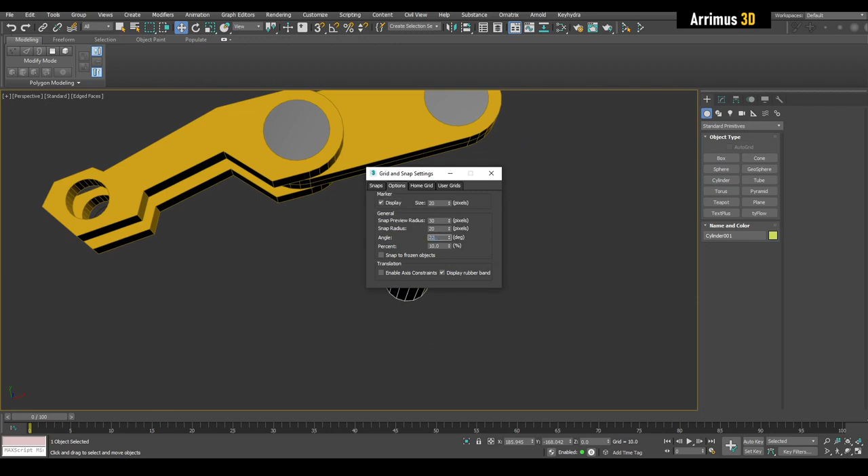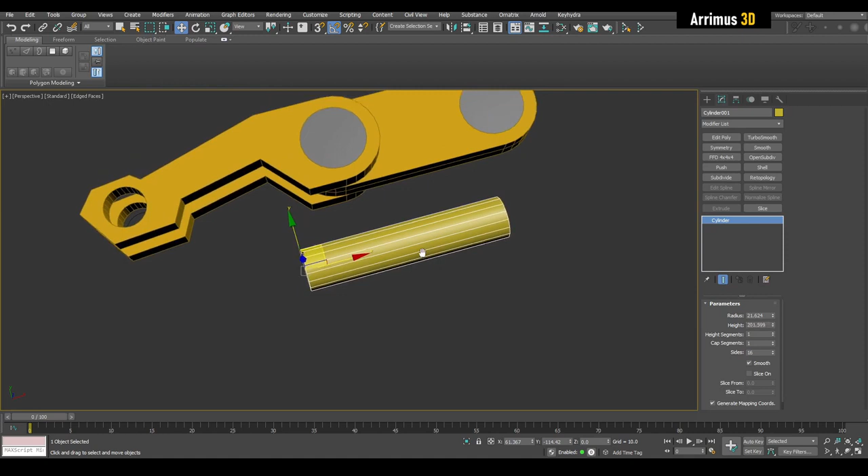Let's increase the height. So we're going to have this. Then I'm going to press Ctrl+V to create a copy of this. We're going to move that here, change the radius, and change the color as well.

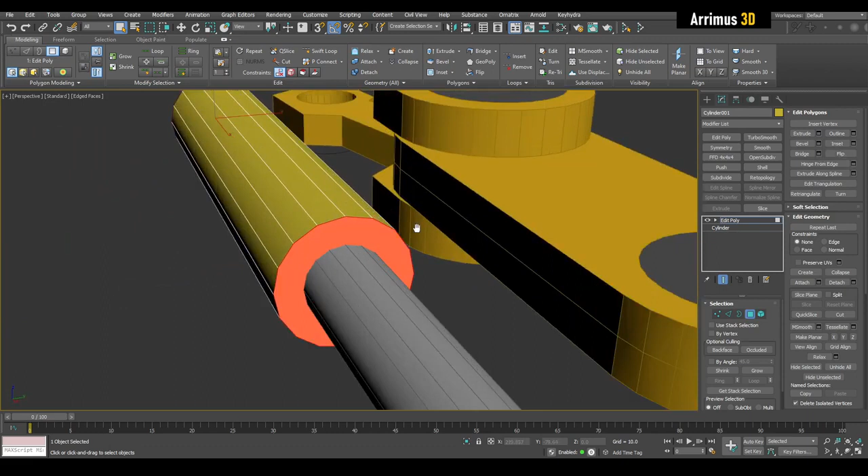Now that we've got that, let's modify this as well. I'm going to apply Edit Poly on top, select this and this. Now you can use inset on this, or simply scale on the Z and Y axis holding down Shift.

Then simply bridge. Now we have this hollowness here, so now this can go inside of here.

Now we need to set up 2 pivot points for this. Actually, for this I want to close this up. So what I would do is insert a loop through here, then select a polygon here, hold Control, double click to get this, and hold Shift while scaling. I'm pretty much going to delete that, double click on this, and what I would do is deselect these and bridge that.

Select an edge here, ring, connect, and then just target weld.

To speed up the process for this, I can just hold Shift, Control Shift, and move to flow into element, flip that, press S for snaps, right click here, make sure it's set to vertex. I'm going to hold Control and convert to polygon selection to vertices. I'm going to snap this right here, select this, and we're going to weld. So now pretty much being limited to right here.

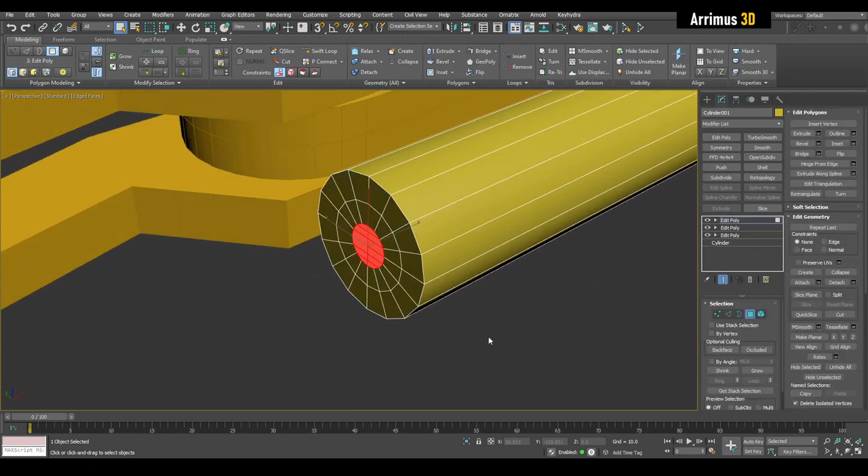Next, what I need to do is just use by angle. So what I'm going to do is extrude this. I'm going to select this and hold Control and click on remove. What I'm going to do essentially is use the cut tool like so. I'm going to weld just in case.

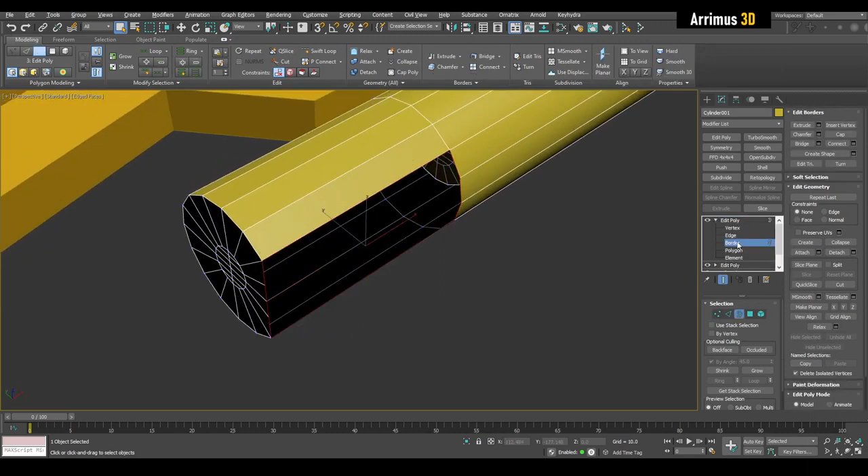Now I'm going to simply delete this and go into border level. Select this and Alt+P to cap, that's the default hotkey. If it looks a bit strange, all I have to do is select these vertices and connect.

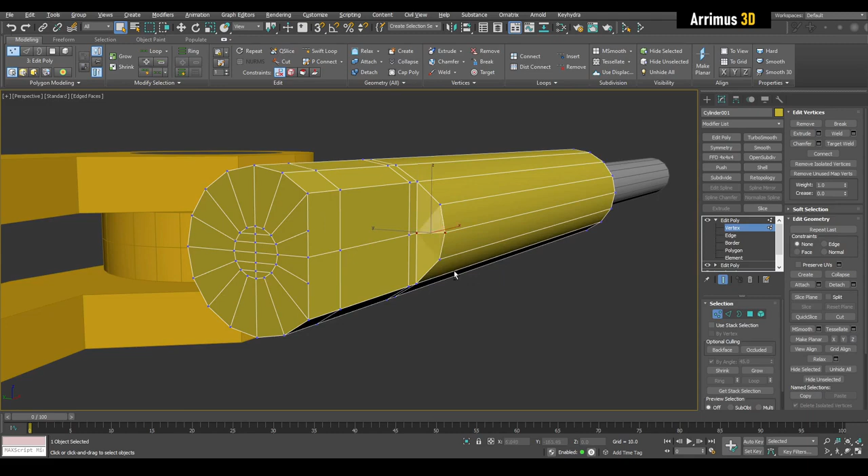So we can also insert loops through here. Select these edges and move them. I am going to select this, ring, connect these. I'm also going to switch this - if you're seeing this effect right here, simply switch to model assist. So we have that.

We have 2 quads here, but we have an n-gon here. How do we fix that? Well, what I would do here is just select this right here and remove that. There we go.

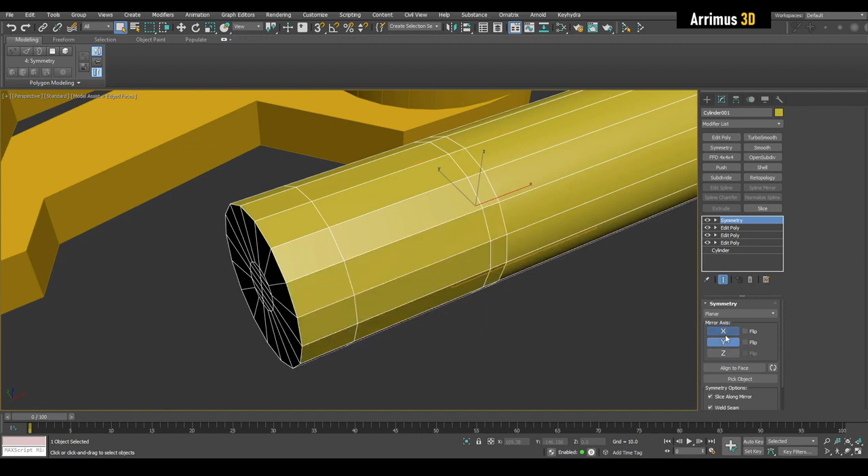Now let's apply symmetry as well, on the Y axis, and flip that. Now we have this happening. This will look a lot better once we subdivide it, but I'm also going to insert a loop for better subdivision right here.

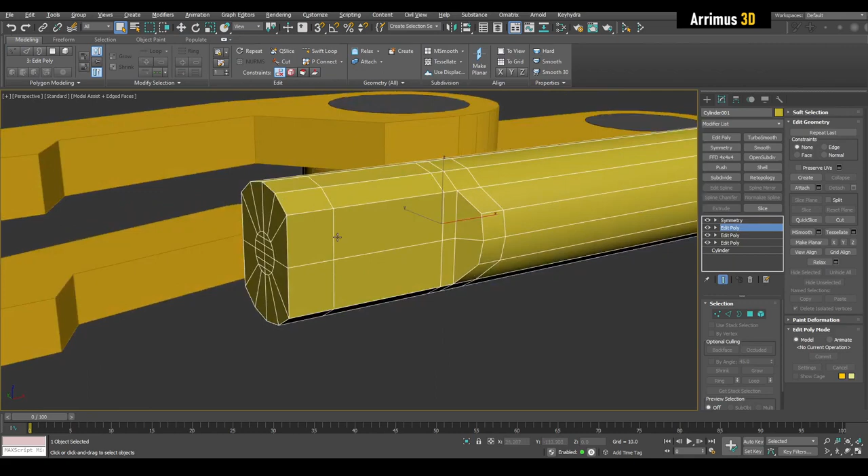Alright, we also need a hole through here. So what I will do is insert a loop here, double click on the loop to loop it. What I'm actually going to do is hold down Shift, left click, left click, left click, left click to get that. I'm going to inset right here.

And what I'm going to do is insert a loop through here. I'm going to select these 4. I'm going to hold Shift while scaling. I'm going to use a script called the regularizer script, which I've set to a hotkey. You can just move this all the way here because symmetry will take care of that.

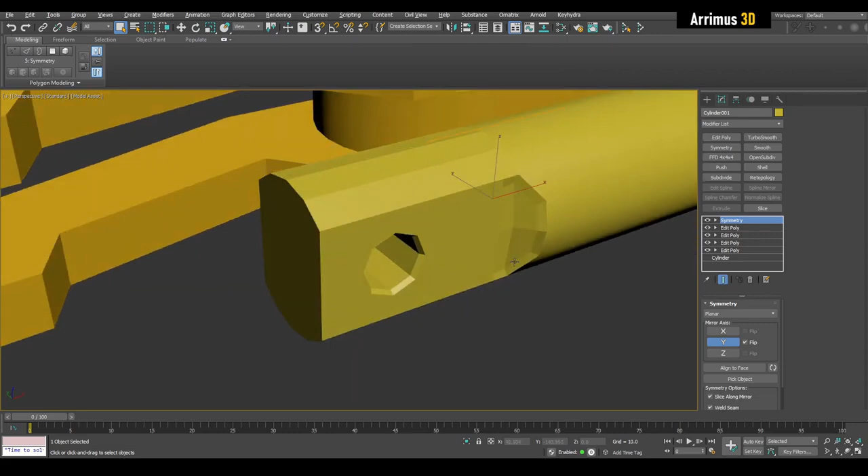So now we have a place to put another object here. What I like to do is that sometimes as you're modeling, you will have some smoothing groups and some polygons unsmooth, which creates this kind of effect. I like to just apply a smooth modifier to even them all out, and then we can very easily see all of the individual faces.

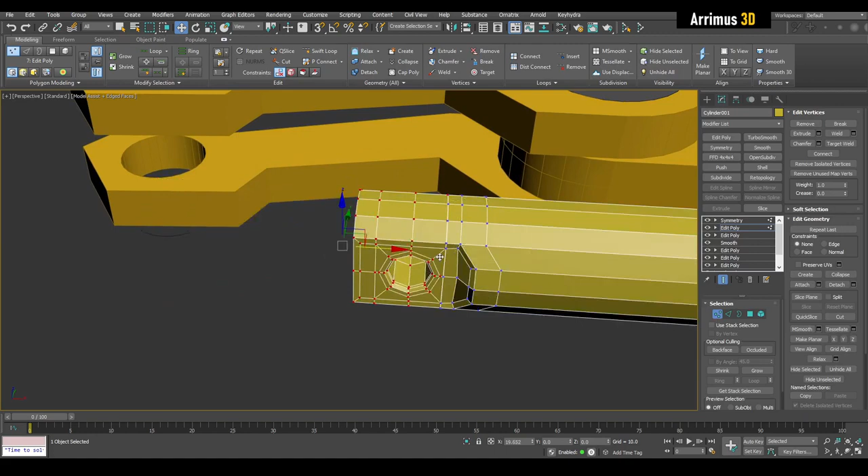Alright, we've got this. You can feel free to just kind of modify this. You can make this longer or shorter like this. Alright, I'm going to go with something like that.

For better subdivision, I'm also going to just use the cut tool, set up different loops here.

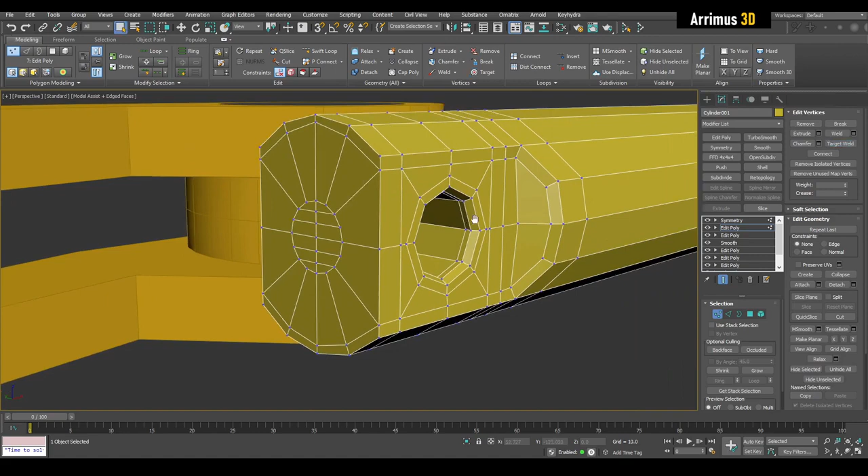I want to insert a loop here as well. Maybe one right there.

Alright, now in order to get something to hold this, I'm going to go into face level. I'm going to use by angle to select this. Alright, I'm going to detach that as a clone.

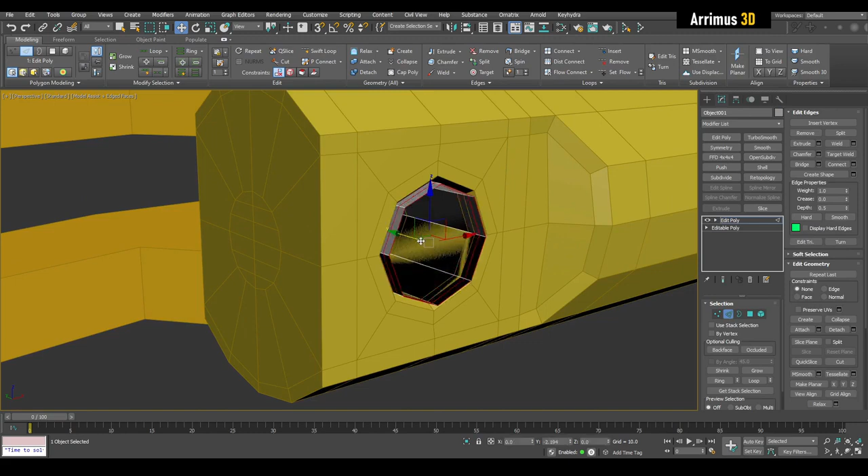We now have a new object here. I'm going to delete this. I'm going to flip polygons. I'm going to give this a different object color, and I'm going to select this, and I'm going to move this out here. I'm going to reapply symmetry there.

Alright, next I want something to hold this, so I'm going to just copy the symmetry modifier. I'm going to turn off by angle. I'm going to select, let's say, these faces, and detach them as a clone.

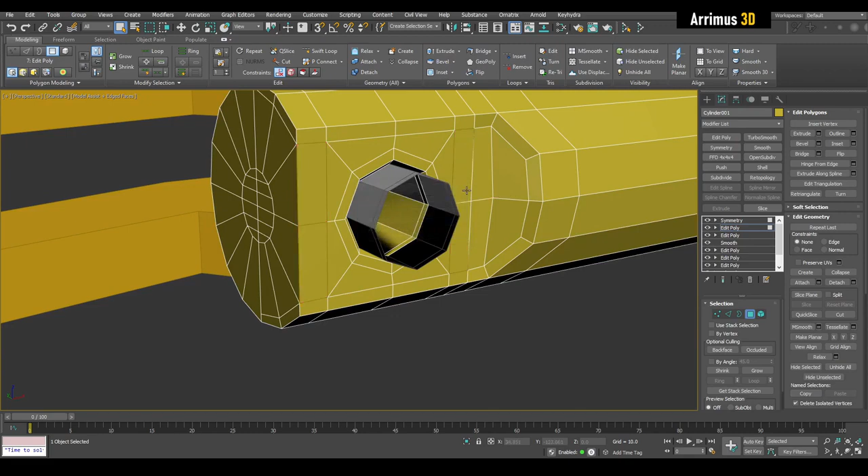I'm going to select these edges and bridge that. Okay, we can even remove this. And we're going to apply a shell modifier. We're going to paste symmetry right back here and give this a different maybe object color as well.

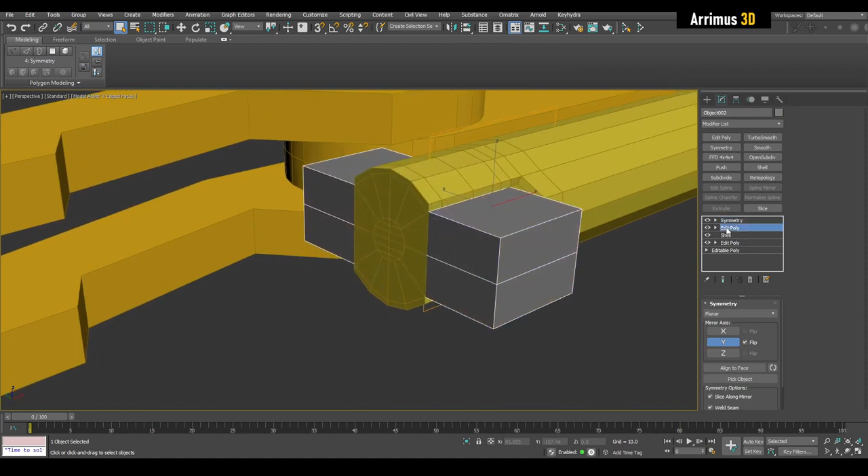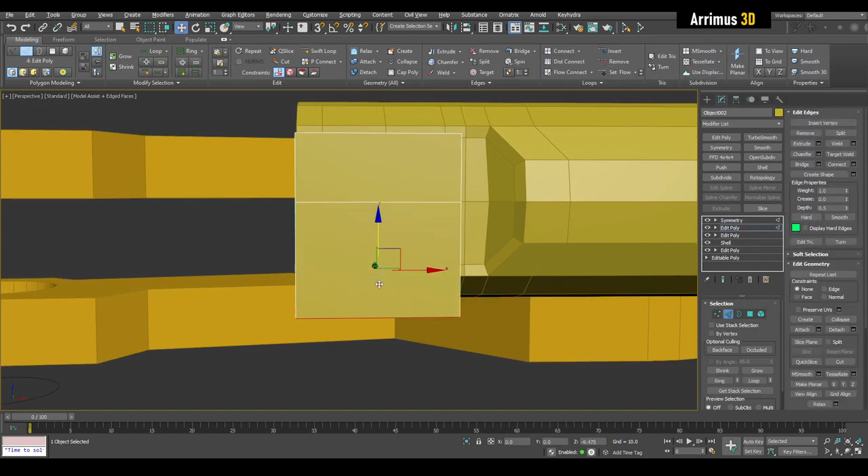Actually, we'll keep this as yellow. We're going to move these vertices. Alright, something like that.

Feel free just to give your object some extra quick detail just by doing some basic extrude right here. And I'm going to use the smooth modifier once again just to even things out here.

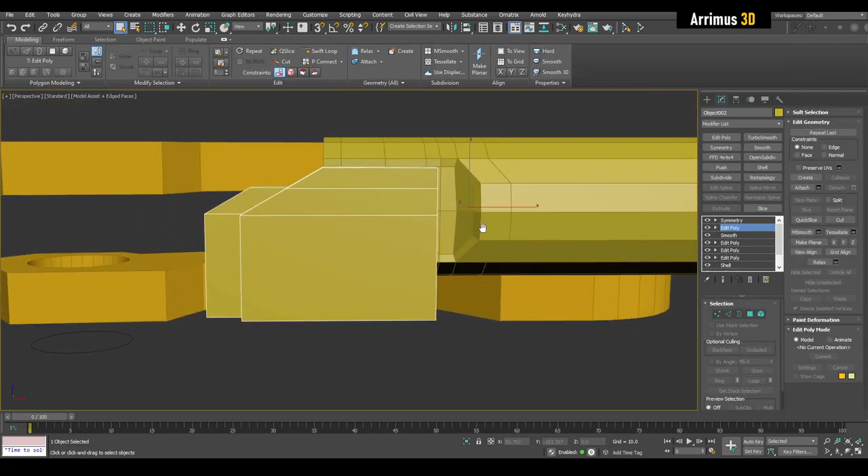Alt X for transparency. Planar on the Z-axis here, and just kind of moving some things around to give this more visual interest.

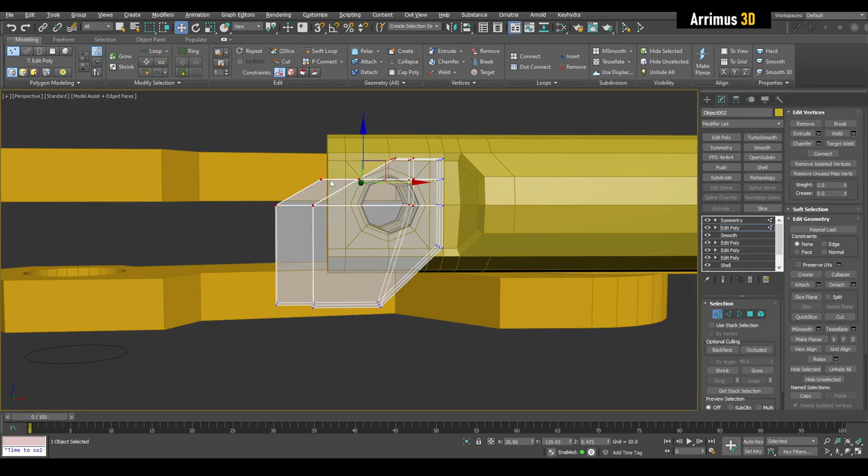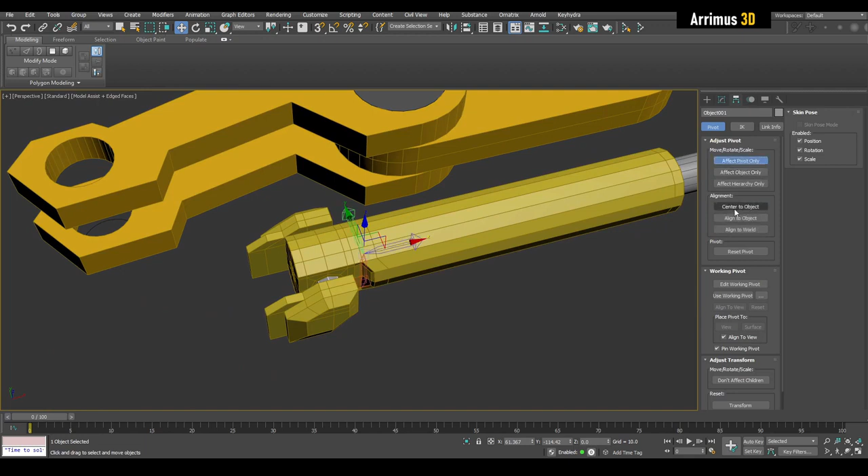And symmetry on this as well. So sometimes a really nice thing to do is just to quickly extrude this out and scale. I'm going to select this right here, and I'm going to affect pivot only, center to object, and also set that to a hotkey as well.

I'm going to select this object. I'm going to go into affect pivot only. I'm going to press Alt A and then select this object that we just did that to, to set up the same pivot point. And what that will do is now we have this rotating around here.

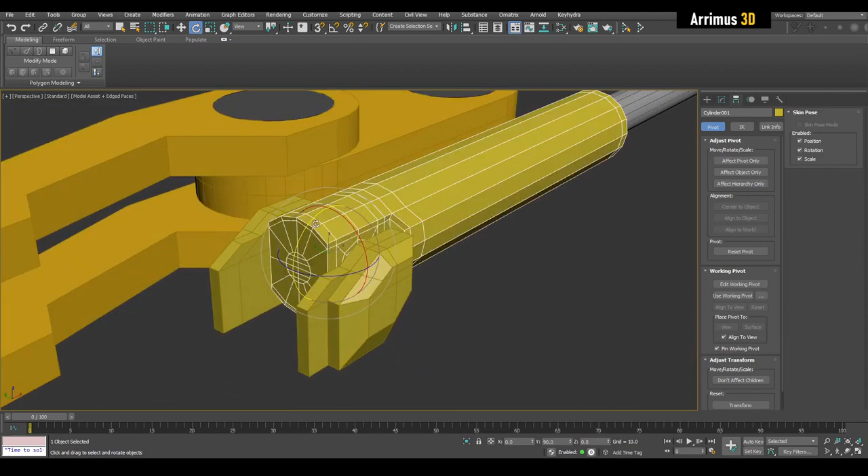Alright, we also need to set up a hole here as well. So what I'm simply going to do is just extrude that. I'm going to insert, I have two loops through here, and I'm going to insert loops through here. And what I'm going to do is just select this, grow, inset, and then extrude.

I'm going to scale that.

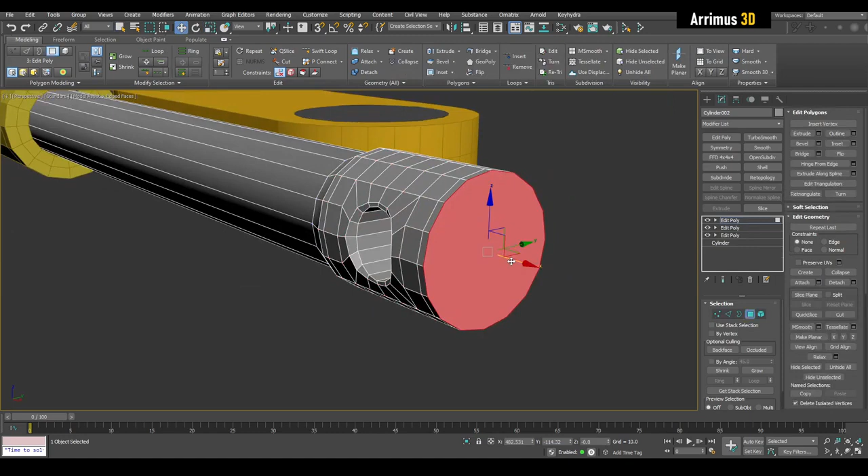All right, I'm going to isolate that. I can delete this and go on here since that part will not be visible. And I think I'll make this a separate object as well, so I'm going to detach that.

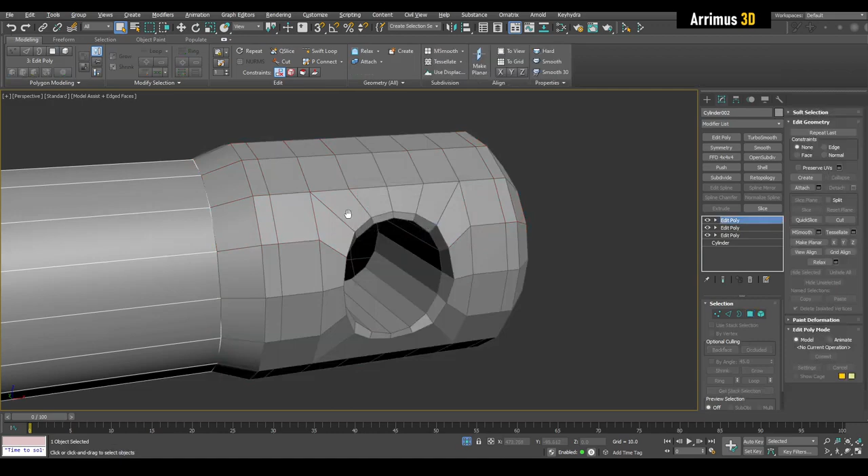Going to hold shift while scaling inwards here, insert a couple loops, and do the same right here. And also detach this as a clone.

I'm going to paste that modifier back here. There we go. I'll give this a different object color as well, just a little bit darker. I'm going to go ahead and reuse this as well. Press A for angle snap, rotate this by 180 degrees, and just going to move this over here.

Alright, at this point I'm going to save. I'm going to reset the X form for all of these. You can set it to a hotkey, but you can also go into here, reset X form, reset selected. If this is not available here, simply click on this button and find a reset X form right here and drag it into one of these empty buttons. You can also increase or decrease the number of buttons right here. So now I've got X form one here.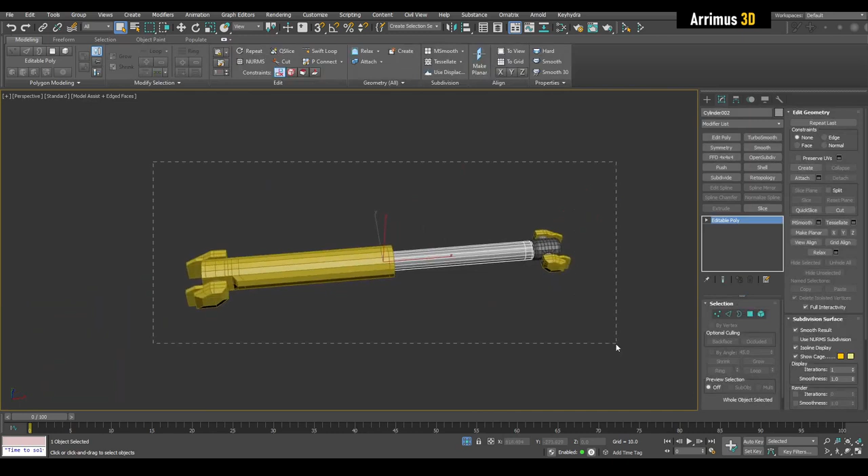And actually, before we rig this, let's set up the subdivision as well. So I'm going to select all this and just reset that. Alright, we'll go into edges, we'll select them. Maybe we need to increase this number. Alright. Hold Control to add. We may need to increase this even more here. Create set. Alright, let's apply Open Subdiv and test it out.

And we can just add some edges here. Oh, we should close up this hole.

Alright, so what if we only want to work with one object? We've got CreaseSet on all these objects. What if we only work with one object? Well, we select that object. When you click on CreaseSet edge, notice how I cannot work with other ones. If I want to work with them, I select that and then I can work with them. So it's a very convenient system here.

Alright, so what I'm going to do is add some, and I'm going to update that. I'm going to select this one and one on the other side. I'm going to ring that and I'm going to subtract that. Right, now we've got that, I'm going to delete Open Subdiv. And so now we've got this basic hydraulic system.

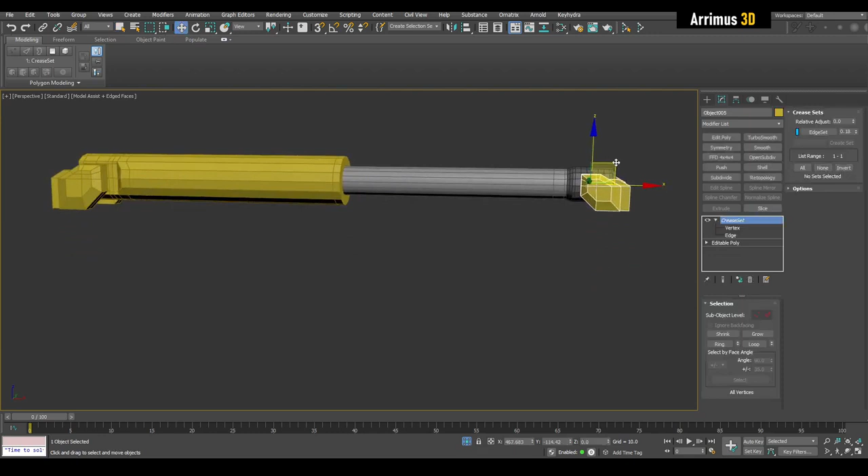And so now what we need to do is rig this up, because if I start moving this around, notice how there's no rigging happening here. So we need to set that up. So what we need to do is select this right here, and we're going to go into animation and then constraints and then look at constraints.

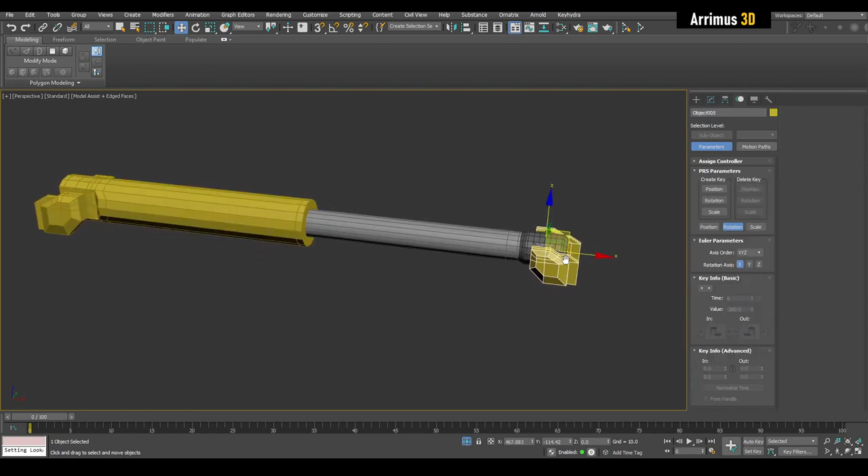And we're going to select, let's say, this object right here. You can click on keep initial offset if you see it moving around. We're also going to select this and we're going to link that right here. So now as this moves around, as you can see, it is pretty much looking at that.

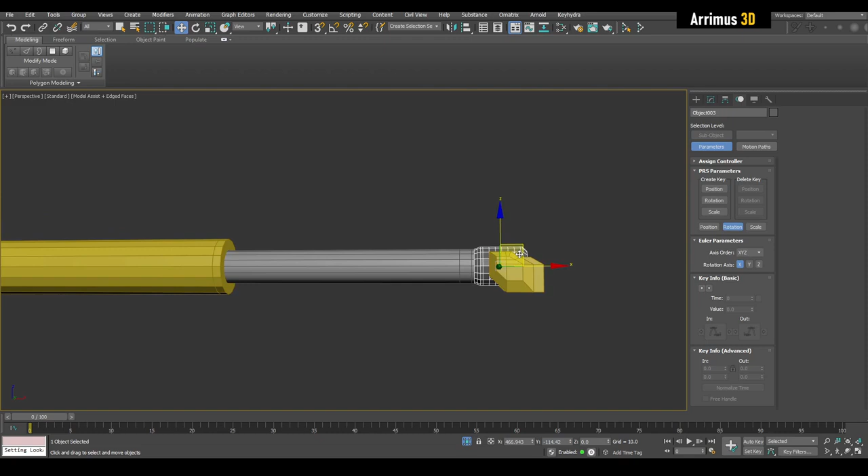Right, we'll select this object and we'll do animation, constraints, look at constraint. We'll also select this object. So now if this object moves around, they're both looking at it. Actually, we're going to link this one to here. And we're also going to give this object a look at constraint.

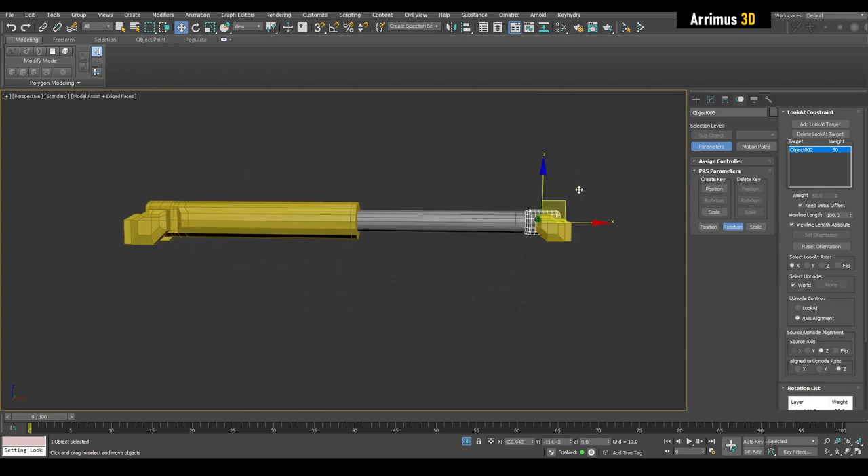We're going to go into animation, constraints, look at constraint, and select this one. Keep initial offset. Alright, so as you can see, we now have this going on. If we move this, we're also going to link, let's say, this to here. Alright, so now if I select this, move it around, you can see how it's following. And we've got this pretty much, we don't want to go out too far, of course.

We now have this nice rigged system. Alright, that's going to come in handy for just adding these kinds of hydraulic pistons all over our object.